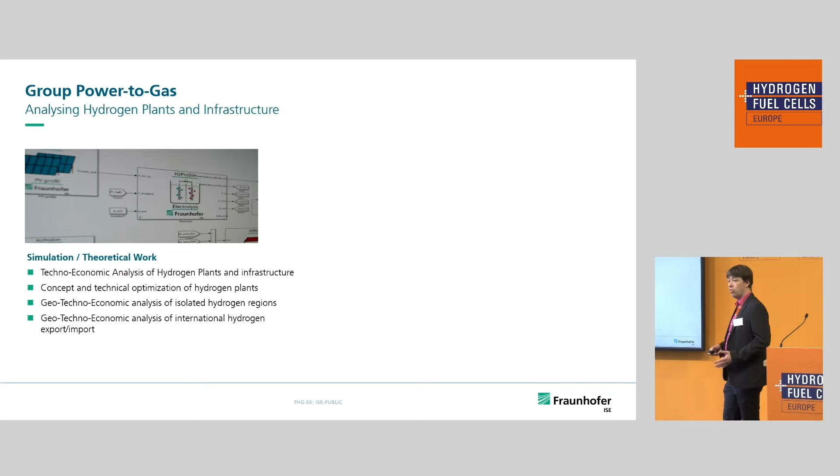I'm heading the group Power to Gas, and what we're doing is we're analyzing hydrogen plants and infrastructure. That means we're doing a lot of theoretical work, and we're using our models to do a techno-economical analysis of hydrogen plants and infrastructure. But we're not only analyzing, we're also doing concepts and technical optimizations of these plants. And we're not only doing that for single plants, but also for whole regions and supply chains. That means we're also doing geo-techno-economic analysis of isolated hydrogen regions, model regions, and of international supply chains.

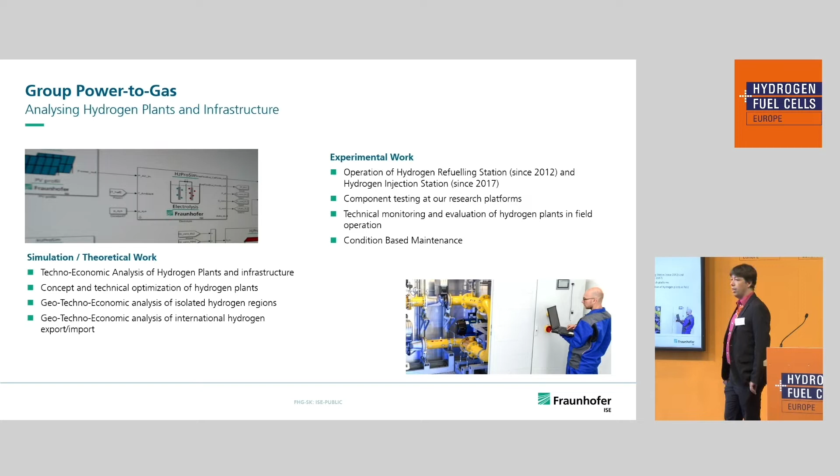We also have a little bit of experimental work. That means we are operating the hydrogen demonstration plants of our institute. In specific, these are the hydrogen refueling stations since 2012 and our hydrogen injection station since 2017. And we use these to actually test components at our research platforms for use in the respective fields. We use our knowledge from these plants to also do technical monitoring and evaluation of hydrogen plants in field operation, and condition-based maintenance for these kinds of plants.

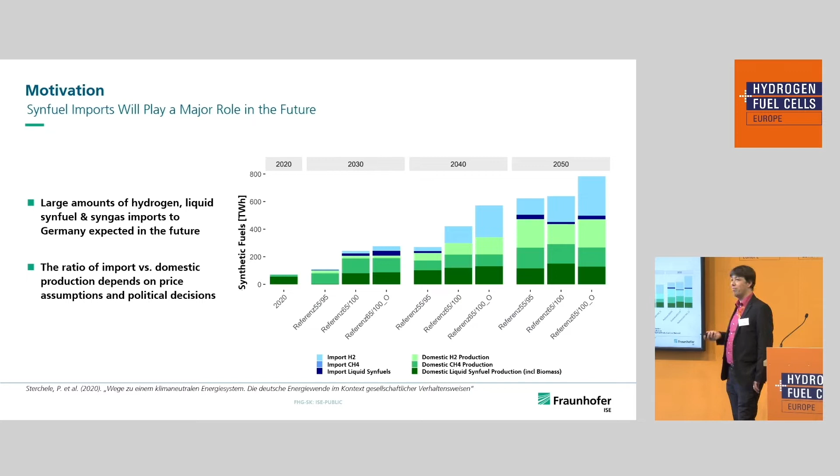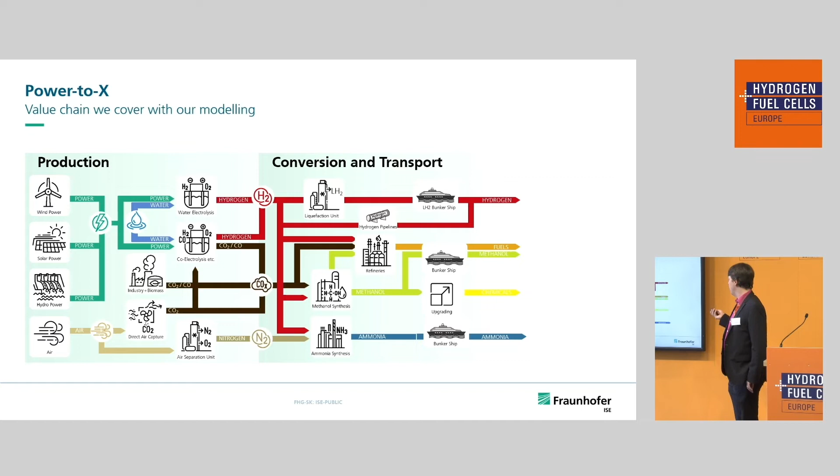Or we can see it, and this is not very visible, we can do some upgrading and use methanol to actually produce chemicals. If we're looking at ammonia as a resource or energy carrier, we need nitrogen. That means we need an air separation unit. We feed that in an ammonia synthesis plant. We produce ammonia, and we can again put it in a bunker ship and transport it via the sea.

So I would like to talk a bit about our approach to analyzing hydrogen supply chains. So first step in all our analysis is a GIS analysis of the countries in order to identify well-suited or best-suited regions for hydrogen or synthesis production plants. That means we take into account population density, renewable energies, and so on. Weather data in order to identify interesting regions.

We use an internal database with a lot of different parameters for technological parts like the electrolysis plants today and in the future, efficiencies, capex, and so on. And we have to define a couple of boundary conditions, like, for example, the export destination. And with these kind of data, we generate the necessary time series for our simulation. That means we generate data, for example, for wind and solar production. We look at transport routes that are possible to use, for example, based on real-world shipping routes.

And with that, we do a modeling and simulation. That means we put together all the different parts of the hydrogen production system or supply chain or synthesis production system in order to model the whole chain. We do that with a dynamic, non-linear modeling of this approach. That means we are able to actually see changes during the year. We can see different non-linear efficiency curves and stuff like that. We also can consider operation management decisions.

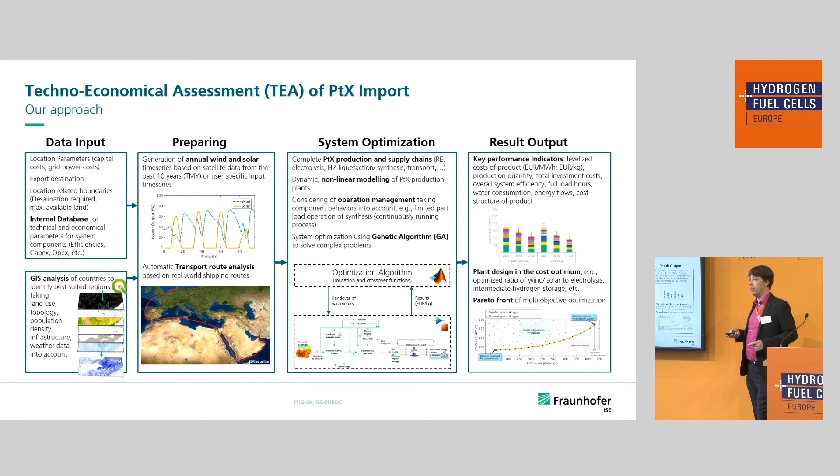And with this, we get a couple of results. So this is on the one hand side, a set of key performance indicators, like, for example, the levelized costs, the hydrogen production quantity, so how many tons do we export, what's the investment cost, what's the system efficiency, what are the full-load hours, and so on. And we also get the description of the plant design in the cost optimum. And this is what a typical result looks like. And now we have to look a little bit more into detail.

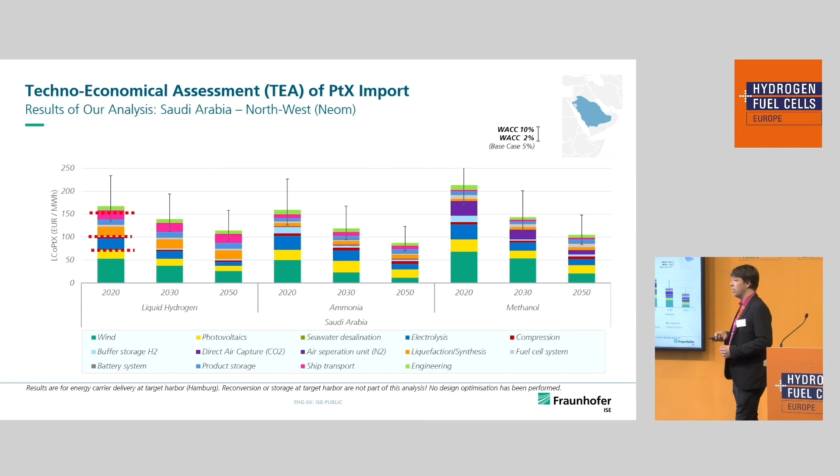So we didn't use a carbon dioxide source, like, for example, a coal power plant, or anything like a biomass power plant. So we need to do direct air capture. And that is actually what is very expensive in the 2020 case, and has a slight decrease over the next years, and makes methanol a bit more expensive.

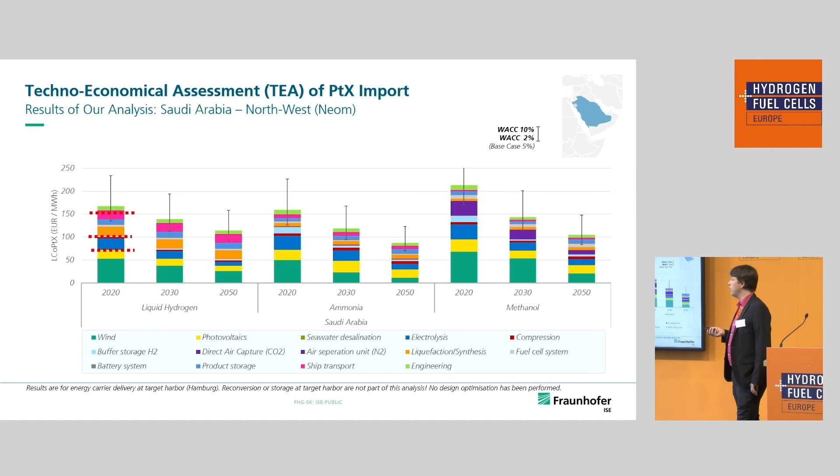So we're talking about producing hydrogen in the desert. A lot of discussion always goes towards: in the desert there is no water, and if you use the water that's available there, that's not a good idea because you take water that is needed elsewhere. So what we have been doing in the last couple of months is that we included water supply into our models. That means we can now look at the different regions and see, is there enough water available for our electrolysis plant? And if not, what is the cost of desalinating seawater and transporting it to the specific location of the electrolysis plant.

And of course, if you're looking a little bit more into detail, look at ways to actually improve the efficiency or the cost of that. For example, again, using waste heat that occurs anyway to reduce the energy consumption of the desalination plant.